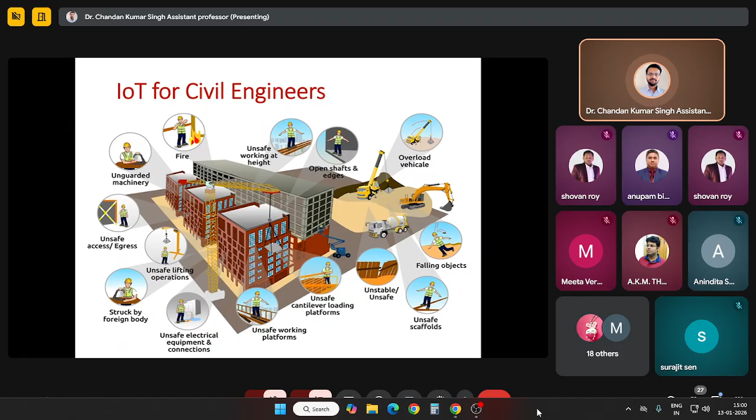On your screen, you can see from this schematic figure several possible IoT applications for civil engineers. For example, fire, unsafe working at heights, open shafts and edges, overload vehicles, unsafe scaffolds, falling objects, unsafe working platforms, unsafe electrical equipment and connections, struck by foreign bodies, and so on. These are the possible areas where, as a civil engineer, one can think of applying IoT technology.

Safety helmets are one of the widely acceptable solutions, though not visible everywhere, but still widely accepted. GPS sensors have been installed in safety helmets, along with temperature sensors and other gadgets. This helps in several ways to improve the health of the person wearing this helmet - a heart rate sensor, a GPS sensor, and if there is any leakage of gas or harmful gas, that sensor can also be activated. There's a lamp for low light, a camera, a temperature sensor if the working environment is exposed to heat - all those things are mounted, along with GPS for tracking location.

For your information, I have also developed one IoT based device where we measured heart rate. With the help of our team of professors from the biomedical department and students, we developed a batch of IoT based devices which help construction workers and professionals measure their heart rate and overall health.

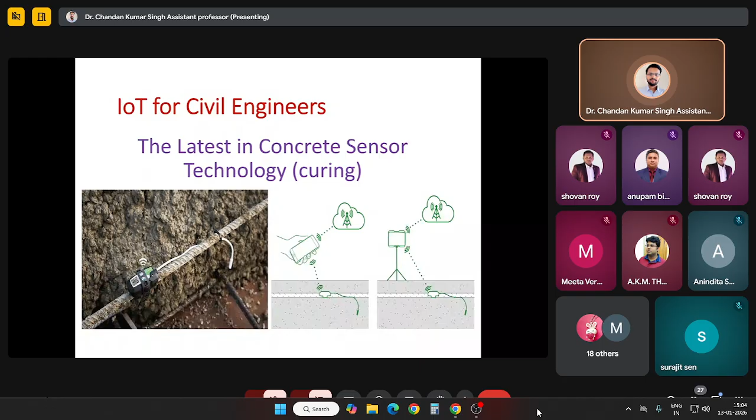Material monitoring sensor monitors the crack for weakening concrete in real time. Theft protection, this already people are knowing.

So this can also be applied in construction site, like everyone is nowadays using CCTV camera. As I mentioned previously, there is a computer vision or image processing software algorithm also being there. So one can monitor this using a sequence or series of images to prevent theft at construction site.

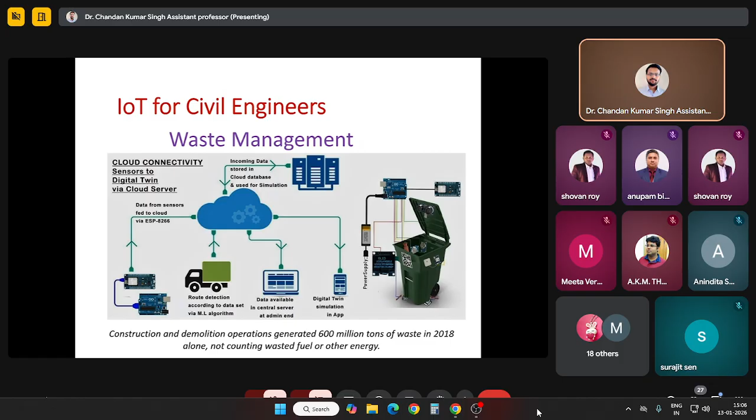Other applications include real-time monitoring and data collection of water quality parameters like pH, turbidity, dissolved oxygen, weather monitoring, climate monitoring, which includes rainfall, temperature, humidity, wind speed, and so on.

Water management conservation includes smart irrigation system, water usage monitoring, reservoir dam management. Infrastructure management, which includes leak detection in pipe, predictive maintenance of equipment, pump valves, remote control, flood and drought management, data integration and analysis.

There are GIS integration, visualizing spatial patterns in different temporal and spatial scale. Community engagement and education, real-time data on water quality and usage.

For your information, I and my team in one of the research project called condition assessment of Mahanadi River Basin, we have developed one IoT-based application for community engagement and education, where we have developed a public dashboard where we have trained students and people to collect real-time water quality data across river. So that is also one of the tools which we are working on.

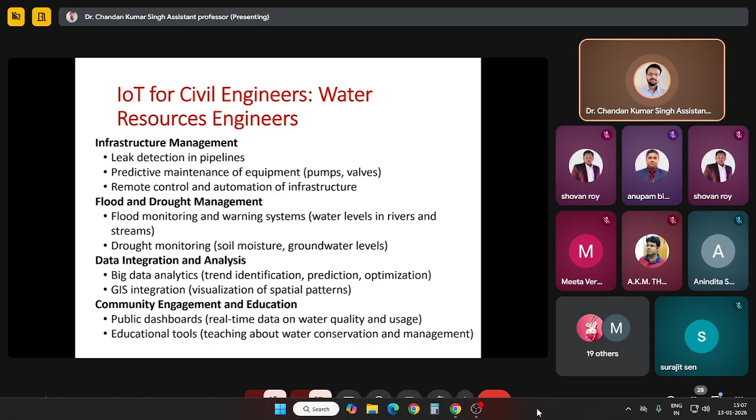Data, other challenges and considerations are also there, as all technology has some pros and cons. Some of the challenges are data security and privacy, interoperability, cost, and maintenance.

Artificial intelligence. This is a buzzing word nowadays, and this will remain buzzing for another decade. Structural health monitoring for civil engineers, it will be very useful. AI ML algorithms can analyze data from sensors embedded in structure to predict and identify damage.

Construction management, smart infrastructure, geotechnical engineering, like machine learning techniques can analyze soil data to predict landslide, assess ground stability, optimize foundation design. Nowadays, some of the mining industries are using this technology, machine learning techniques to analyze landslide.

Also in hilly terrain, you will find some pilot basis. People are applying this technology for early detection of landslide and stability of ground.

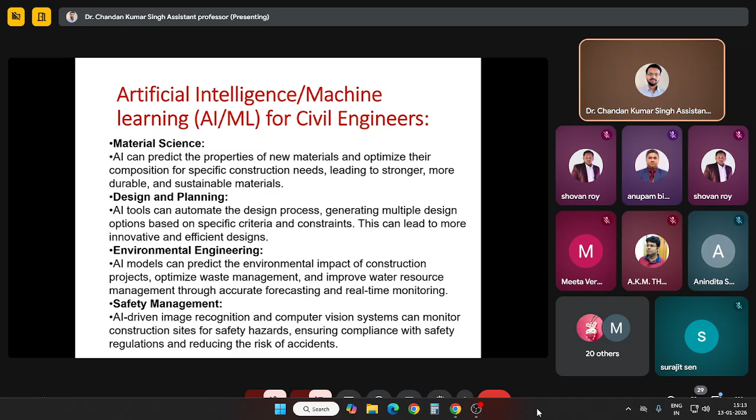Some of the work which I have done, or some selected work I kept here for your understanding. Recently I worked on one research project funded by the Ministry of Environment, Forest and Climate Change, where we worked with one of the NGOs located in Ladakh. We visited Ladakh to solve some geohydrological study in the Leh region.

There we have applied some of the AI and ML technology. We conducted some resistivity survey, field survey, and based on that, used some sensors, a water level sensor, as you can see in this picture, to detect water level in borewells. We have also used some portable sensors to get water quality parameters like pH, temperature, dissolved oxygen and other physical parameters of water.

Based on that, we have applied this work for the artificial glacier, to protect the artificial glacier. Artificial glacier, for those who are not aware, you can see this, there is a shape of pyramid, or people commonly call it a stupa, stupa-like structure, an ice stupa.

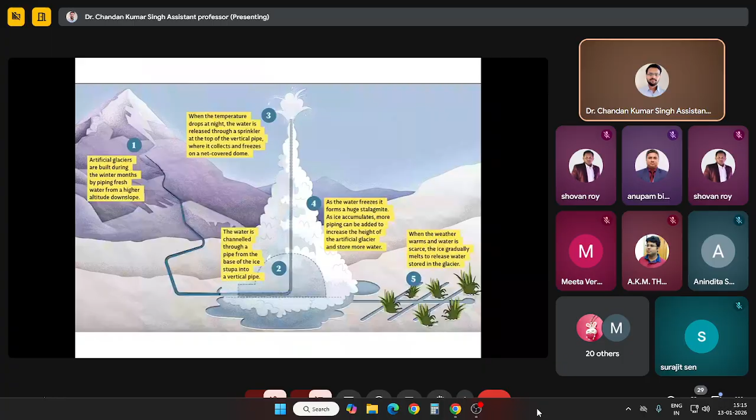So, artificial glaciers, I'll skip this part. What we have done recently, we applied machine learning and artificial intelligence for the Ladakh region for detecting water data. For this particular work, we published in one of the conferences called FICTA in London, and we got the best paper award for applying this technology.

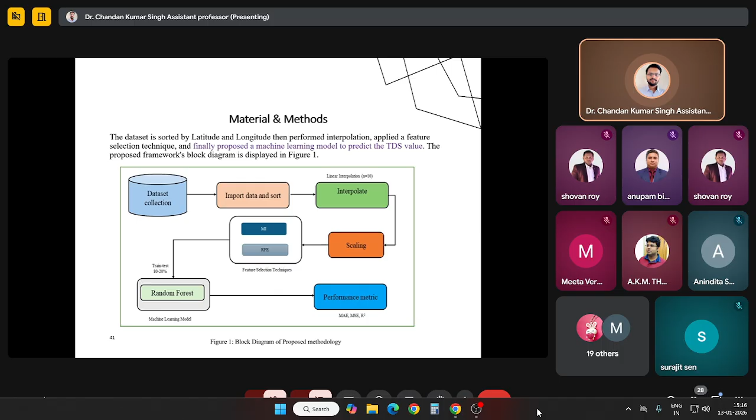I will not go into the details of this work, I'll just speak broadly. We have applied this machine learning algorithm to detect the water quality based on the ground data. We have forecasted some of the water quality data. We have also applied it for different parameters of water, like pH, temperature, alkalinity, chloride, sodium, and so on.

These are the results. Another work we have published based on this machine learning technique is on sustainable water management in the Ladakh region, where we applied a similar algorithm.

Okay, so coming to another technology, are you following? Yes sir, we are following. Okay.

So quantum computing is one of the rapidly emerging technologies. It has enormous potential, and it is based on the principle of quantum mechanics, which offers transformative potential across various industries, including civil engineering, which can solve complex problems of classical computers. So before understanding quantum computing, let us understand the classical computer, the computer which we are using nowadays.

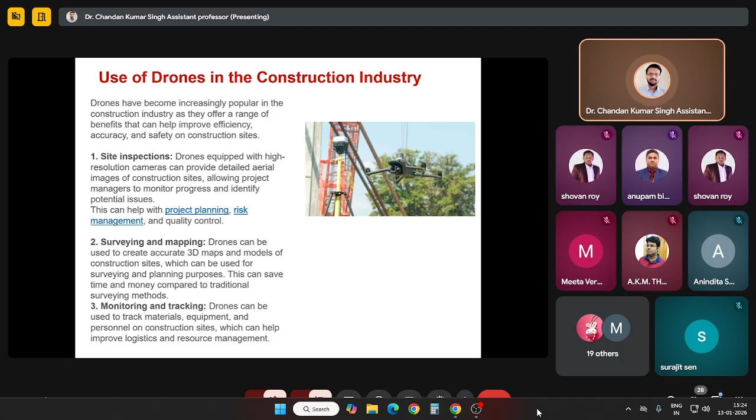Monitoring and tracking: drones can also be used to track materials, equipment, personnel on construction sites, etc. Site inspection can be done with high resolution cameras. Here is an example of a particular site where you can see the drone is able to capture and monitor all the different materials, personnel, and other project components.

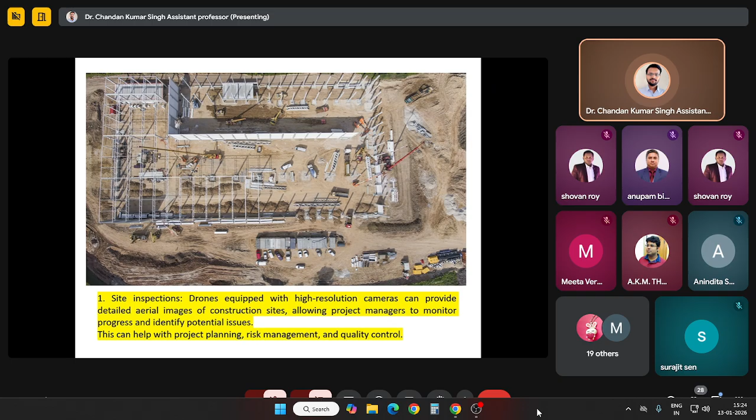You can look at surveying and mapping - as I mentioned, it can be used to create accurate 3D maps. It can also be used to develop contours, which can be used for surveying and planning purposes. This can save time, is economically very sound, and very useful and accurate.

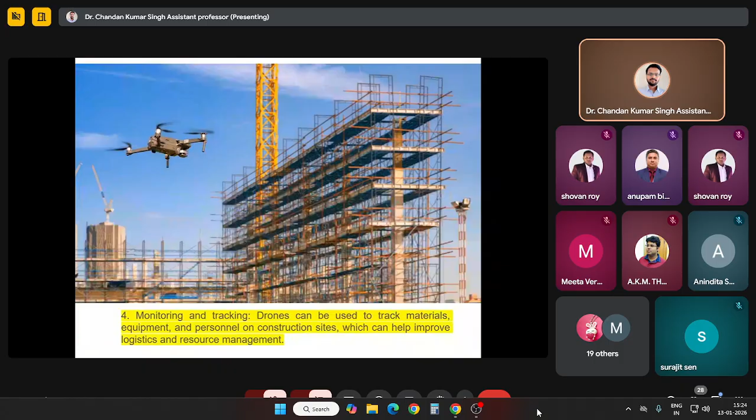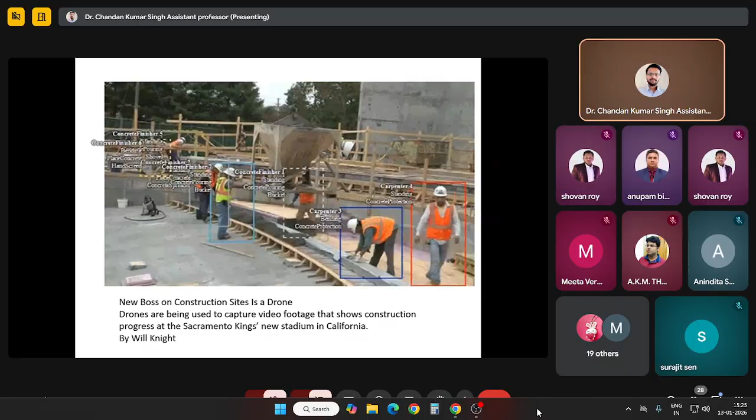For monitoring and tracking, as I mentioned, here you see how drones can be used to capture different activities. This is one example I have taken from the Sacramento region in California. Here is the progress of a particular construction site where you can see the stages of construction which have been captured from a drone camera.

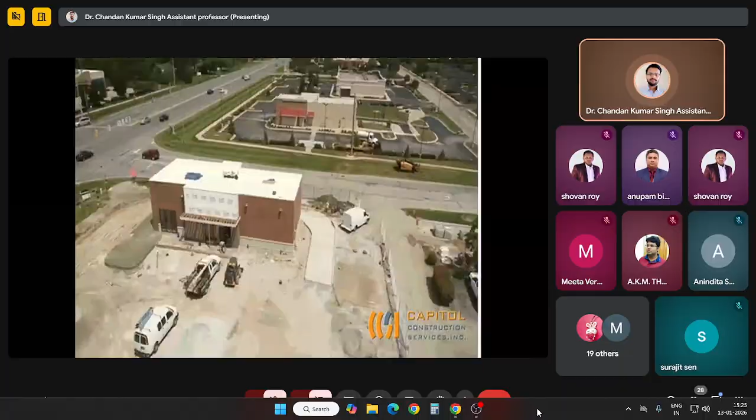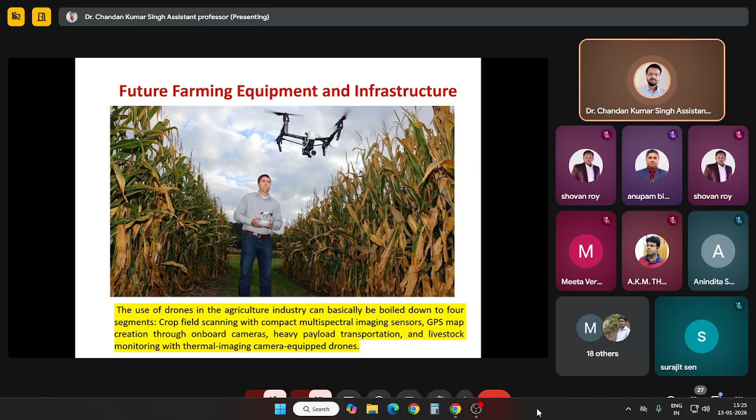Farming sector, as you all are aware about future farming. So automated rice seeding, future farming equipment and infrastructure, chemical fertilizer spray, pest control - these are all already being used by people for pest control and so on.

My point here is that students or even professors can enroll in drone pilot licensing. The minimum eligibility for a drone pilot license is 10th pass. It is similar to getting a four-wheeler or driving license - to drive a vehicle on road, we need permission and license. Similarly, to fly this drone, we also need a pilot license.

There are different categories of license you can procure and purchase, and based on that, the DGCA approved pilot license you can do. In this month of January, from 27th to 31st, we are planning to conduct a workshop for drone pilot license at NIT Raipur. Those who are interested can also participate, but the seats are very limited.

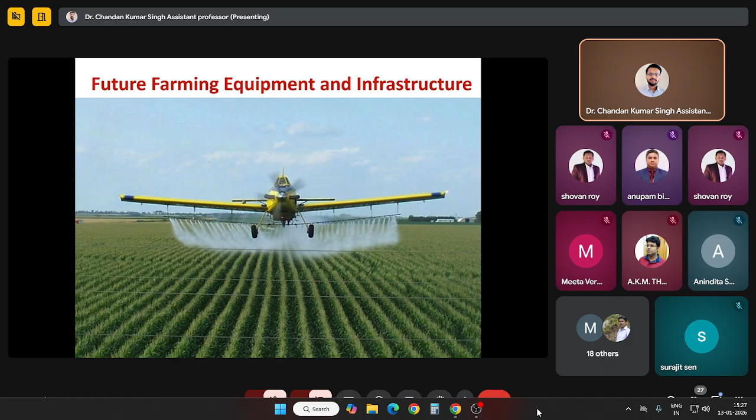So in summary, what we have learned today is basic understanding about smart city, a general overview of recent developments of smart city in India, and technologies for civil engineers, which include IoT, AI, ML - artificial intelligence and machine learning, drones, drone technology, quantum computing, and its various applications in the civil engineering field.

So this is what I have for today. If you have any questions or queries, you can ask. I am stopping my presentation.